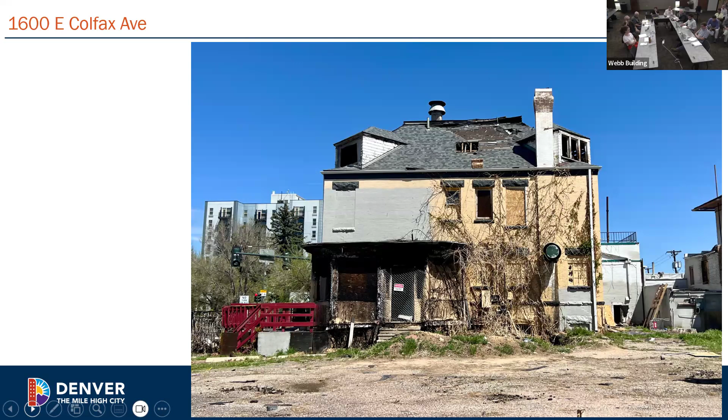So here we just have some current photos of the building, and you can see the massing of the original mansion and the 1938 storefront. And then you can see the photos from JVA, which show a significant amount of fire damage.

Initially, this building did have a skylight in the roof and an oval staircase, which you can see in these images here, which contributed to the overall character of this building. Finally, I have some images of the property when they were historic mansions, then the widening of Colfax Avenue, and finally photos from the 1980s showing that commercial storefront.

So due to the fire damage caused to this property, the applicant has applied for total demolition of this structure.

Chapter 30 of the Denver Revised Municipal Code, colloquially known as the Landmark Ordinance, states that the findings of the commission shall be based on consideration of specific design standards, presented plans, public testimony, and related findings of fact. If an application for demolition is approved, the commission shall require a replacement structure or other site plan as a condition of the demolition approval.

Landmark staff evaluated this property based on chapter 30 of the Denver Revised Municipal Code and what it means to be contributing. The definition of contributing means a structure or feature that adds to the historical, architectural, geographical, or cultural significance of a structure for preservation, or a structure in a district for preservation.

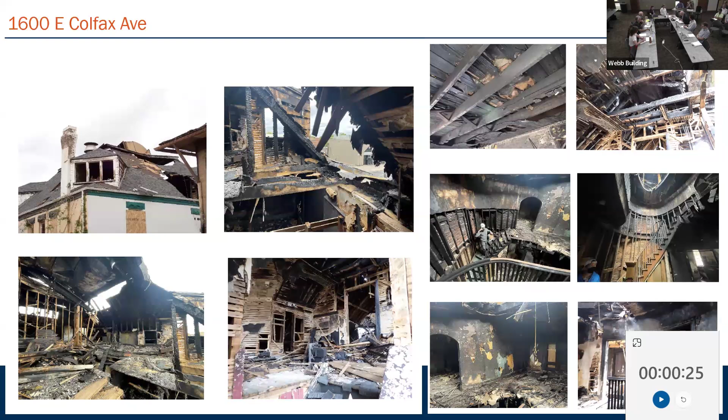So I would say, leading up to COVID, we had 3 tenants that occupied the building, which were huge in keeping people out. So you had customers coming and going. We left that parking lot open at 1450 Franklin that we own for Octavio's restaurant. That kept people coming and going.

At that time, we did put up cameras, so we were notified anytime someone was on site after hours. Octavio, who owned that restaurant, did a tremendous job of keeping people out, because he's operating that business.

When COVID hit, all the business on Colfax shut down, shuttered. And that's when we began boarding up those locations.

At that point, we also thought we were closer than we were in reality to getting approval and a building permit. But we had set expectations with Octavio: hey, we're redeveloping this whole site, right? There's a 7-story apartment building that's going to get built behind this. These homes are getting redeveloped. A part of that redevelopment is removal of all of the environmental issues, right?

So the amount of pigeon activity in the 1618 building needed to be removed. Both buildings were full of asbestos. At that time, Octavio found another space and moved out. So we used that time to mobilize and bring in the abatement team, abated all of the asbestos and all structures.

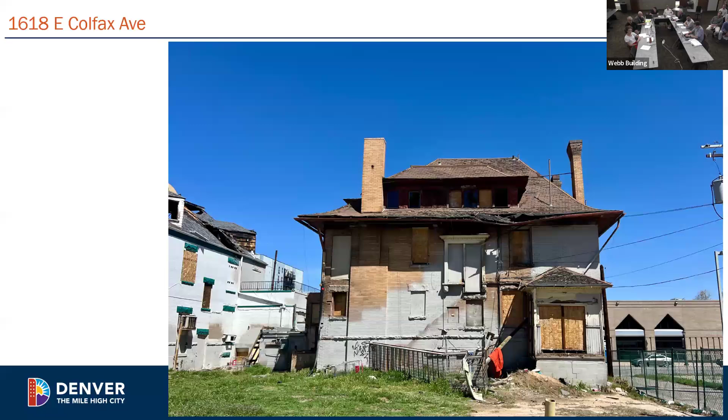I have some additional photos of this property so you can see the condition it is in. It is a beige brick. The painting on the structure is due to graffiti orders from the city; this is how they mitigate graffiti, by simply painting over it.

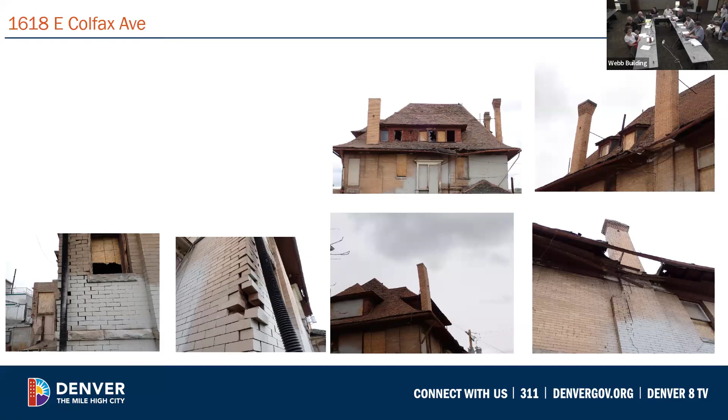Here you can see the addition that is brick, but the front facade has been reskinned and reclad. Here are some photos from the condition report by JVA showing that the materials need attention, along with the same historic photos. You can see the first addition to the property, which was brick, and the changes that have occurred over time with the recladding and reskinning of those additions, as well as a partial view of 1618 East Colfax.

So staff are recommending denial of this request to demolish, as this is a contributing structure to the Wyman Historic District. Our guidelines state do not demolish contributing buildings, and to take all measures required to retain and repair contributing structures.

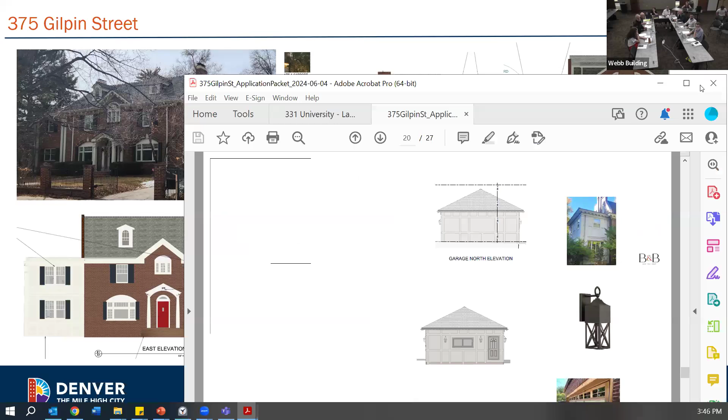The applicant also provided some example photos of other paneled wings in this historic district, which they drew their inspiration from. And that's what staff based it off of. I was trying to find the specific page in the application, but staff felt that it was recognizable as a modern addition. It did draw from the context in the district without being too replicative.

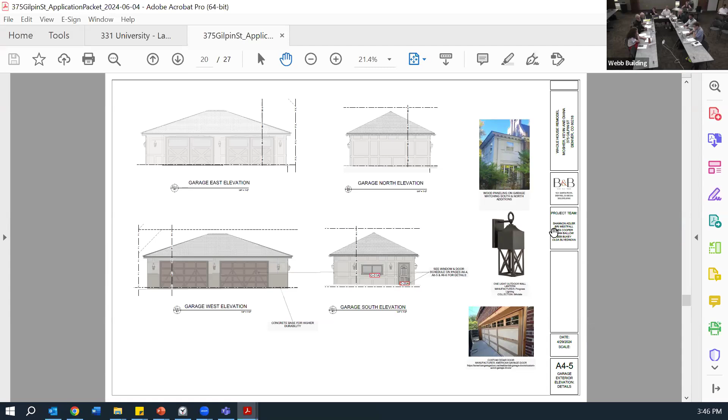And we felt that it was subordinate to that primary structure. They're also referencing the existing height for that non-historic addition, so they're maintaining that height of the non-historic addition there as well. Very good, thank you.

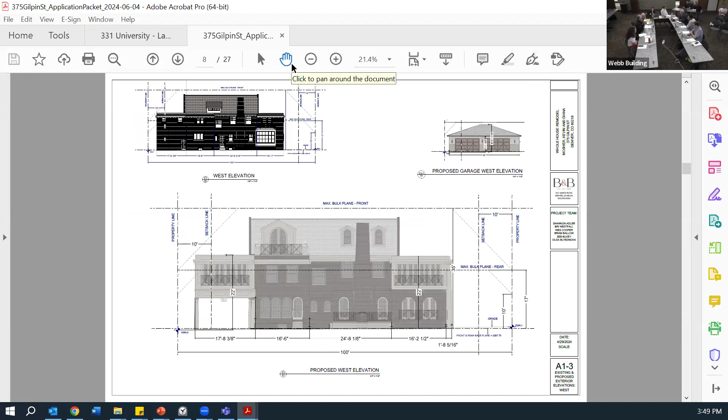Can you speak to that? It's just the design that spoke to them, really. And so your client, you said, texted you and he said there is precedent for a pass-through garage from front to back in Country Club? I think 345, which is in the application, is a double-sided garage on the alley, as you can see.

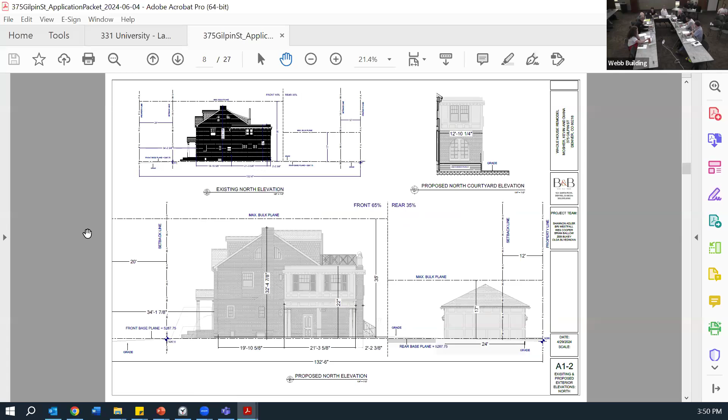Sorry to interrupt again. No, you're fine. No worries. It appears like in the presentation images that are included, you can see the garage doors under the porte cochere, but then the bigger piece in the alley. I looked at that, I couldn't see it. It's a two-story, almost like a carriage house, but it's got a garage coming through the backside. So it's existing functionality, doors down, which is the precedent that was referenced. Got it.

Very good, I'm satisfied. Okay, thanks, excellent. Any other questions, commissioners, for applicants? Doesn't look like it. Thank you very much. Okay, yeah, great, thanks.

Do we have anyone here in the public that wants to comment on the project? Doesn't look like it. Anybody virtually, Taylor, that would like to make a comment on this project? We do have one person, Kevin.

That's a property owner. Okay, that's part of the- well, we still have time, 8 minutes and 48 seconds. So that's okay. We will give him 8 minutes and 48 seconds if he would like to take it.

Kevin? Yes, hi. Hi, how are you? Yeah, good, we can hear you. There's still time left over from the applicant presentation, so we've got 8 minutes and 48 seconds for you to make your comment if you wish.

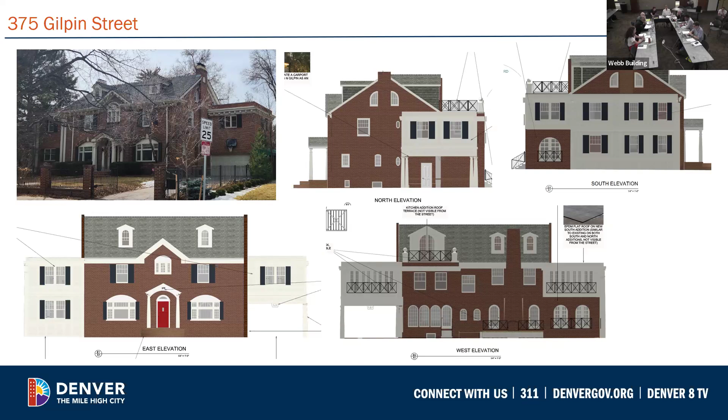And then I raised my hand because I was trying to point out that 345 had the porte cochere that we used as inspiration for the idea. Thank you, Kevin. Commissioners, do you have any questions for Kevin before he goes? All right, Kevin, thank you for joining us. Doesn't look like there are any questions for you. Thank you. Oh, thank you.

All right, staff, any other comments from staff? No, nothing. All right, commissioners, let's go into deliberation. What are your thoughts?

Just want to understand how are they going to manage the remotes for all those doors? Not our problem, that is not our purview. It's just as well as I manage the remotes to my own one TV.

Any other comments, commissioners? All right, do I hear a motion from the floor? Madam Chair, I'll move to approve application 2023-COA-277 for alterations, additions, and garage at 375 Gilpin Street per design guidelines B4, B7, C6, 2.14, 2.20, 2.24, 3.1 through 3.8, 4.18 through 4.20, 5.18 character defining features for the Country Club Historic District, presented testimony, submitted documentation, and information provided in the staff report.

Graham, thank you. Do I hear a second? Second. I think Erica beat you, Larry. So Erica seconded. All in favor, aye? Aye. Opposed, nay? All right, it has been approved unanimously. Yeah, good luck with your project.

Thank you. All right, we are on to our next design review project, which is 2024-COA-283 at 3327 West Hayward Place in Potter Highlands. And Crystal is our staff person. Crystal? Hello, thank you.

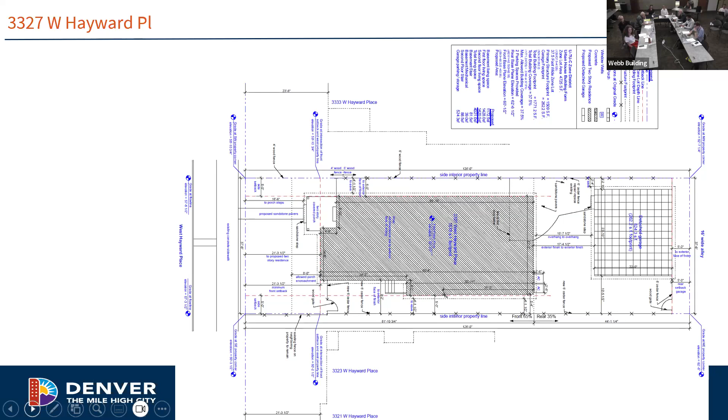Let's see. Nope. Okay, so here's the proposed design. Like I said, a simplified version of a Queen Anne style with a 2-story porch and nested gables with a cross gable bump out, which is characteristic of other Queen Anne properties found within the historic district.

The new 2-story house will include typical features and rhythms found in the historic district, such as window locations, proportions, and that porch location. The overall building height of 30 feet is typical to the district, and the porch and entry location are also typical. The facade uses articulation techniques such as the trim belt course as well as trim window surrounds.

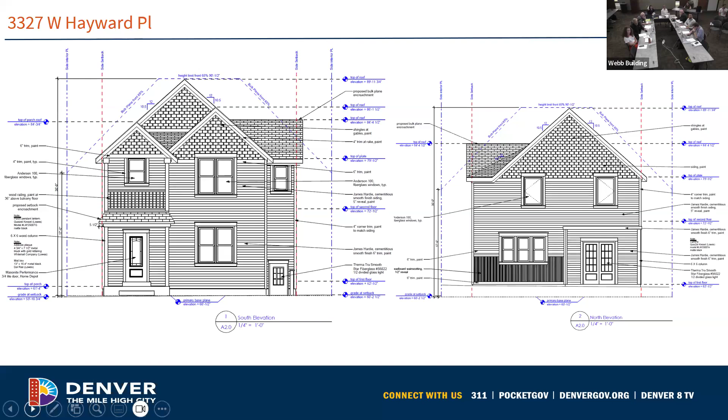Minor changes have been made to the design since phase 1 to better fit in with the historic context. Particularly the 2-story porch now has a closed gable where it was previously open, and the shingle detailing at the gable ends on all sides of the house has been brought down to the eaves to better match historic proportions, as seen at the front and rear facades here.

Next slide. And then here's the other side elevation where you can see the two-story front porch to the right with a simple vertical railing. The home will feature individual and paired 1/1 windows with headers and sills, with those trim detail surrounds at all elevations. Door placements, widths, and heights align with historic proportions.

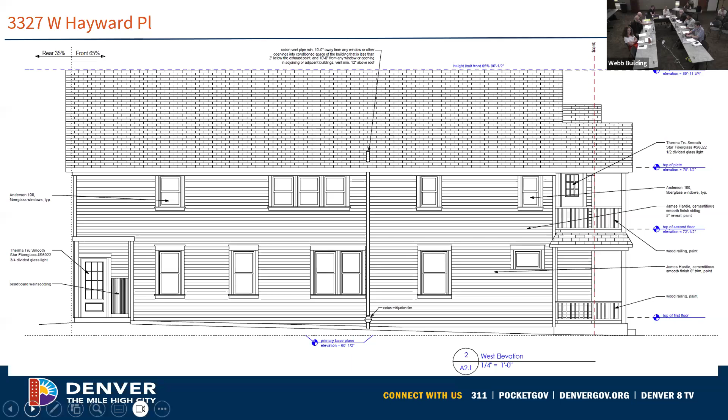Slide. And then here's the proposed garage that will be located at the rear of the lot in a typical location for secondary structures, with garage doors facing the alley, and will be clad to match the primary structure.

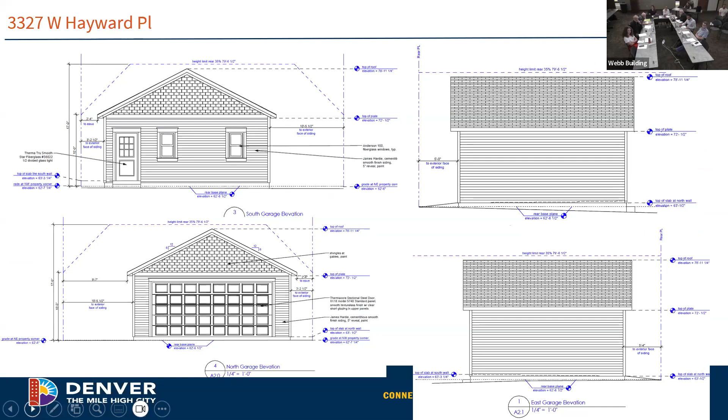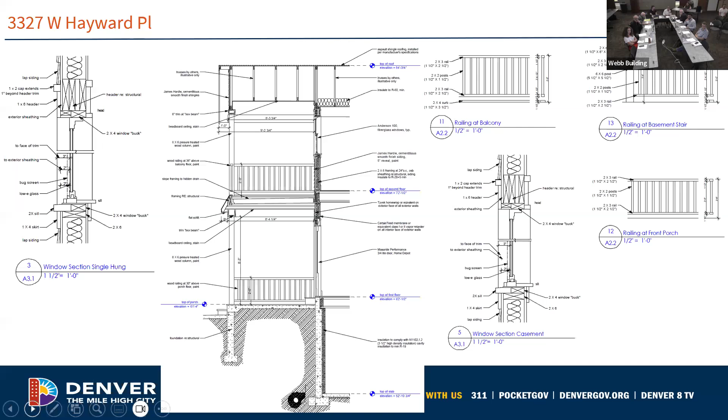Staff also would like to note there is an error in the staff report, as I realized this morning. I didn't correct the motion to call out that this was the phase 2 design detail submittal. So just wanted to let you guys know to correct that in the motion. That would be helpful. Thank you.

All right, Crystal, thank you. Commissioners, any questions for Crystal? Doesn't look like it. Well done, you. The applicant here, they might be on Zoom. Mary is on Zoom. All right.

Mary, I was gonna say, I have, I think it's Ginger on my list. Okay, I just wanted to be sure. Mary might be the property owner too. Yeah, she's the property owner, you need Taylor. Okay, sorry. No, you're fine.

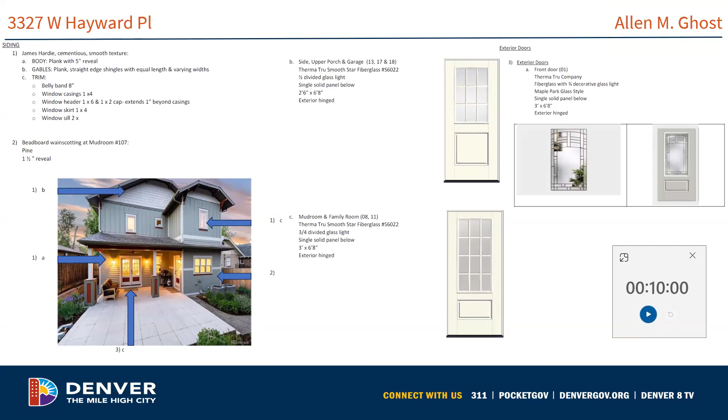Ginger, if you're there, if you could accept our invite to join as panelist. Declined. Connect as a panelist and it's just spinning. Ginger is not getting what she wants. Yeah. Okay. So the spirit is willing, but the flesh is weak. That's a lot on the day. Ginger, you could also try calling in. Looks like she dropped off. Yeah, she might be doing that now. Just give it a second.

I like the color in the photo. It's not great.

I just texted her that she can try calling in. Okay. All right. We'll give her a second here, and otherwise we'll need to get on with the meeting.

All right. I think since we're not recommending denial, we can probably. We heard from the owner. Yeah, we heard from the owner, so, all right, we're gonna go ahead and move forward. There weren't any questions for you all, so.

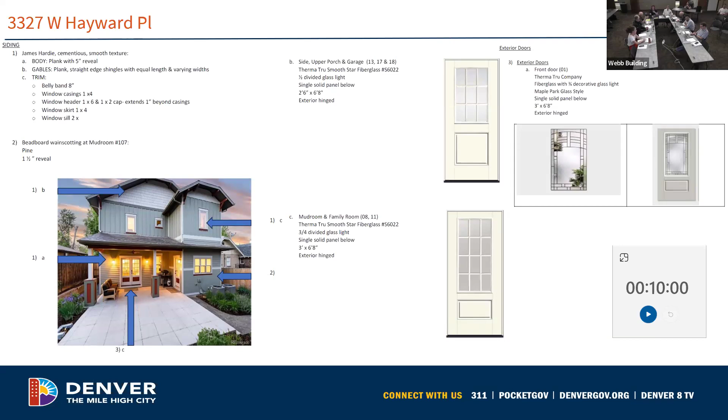Ginger, you can unmute yourself. I think we're going to move forward, as we're not recommending denial, and I don't think we have major concerns from staff. Let's go ahead and ask for any public comments on the project.

Are there any public comments virtually? It didn't look like it, we didn't have any hands raised. Okay, any other comments from staff? No, okay, commissioners, let's go into deliberation then.

What are your thoughts on this project? Cute house. All right, I support that, okay.

All right, do I hear a motion from the floor? Chair, I move to approve application number 2024 COA 283 for phase 2 design details for the new proposed infill structure at 3327 West Hayward Place, as per presented testimony, submitted documentation, design guidelines 4.3, 4.5, 4.7, 4.8, 4.19, the Allen M. Ghost character defining features, presented testimony, submitted documentation, and information provided in the staff report.

All right, thank you, do I hear a second? I'll second. Graham has seconded. All in favor, aye? Aye. And opposed, nay? All right, well, the application has been approved, so 2024 COA 283 has been approved, so you can go forward and be in contact with Crystal.

And speaking of Crystal, she is our staff person for our next design review project, which is 2022 COA 324 at 331 University Boulevard in the Country Club District. Take it away, Crystal. Thank you.

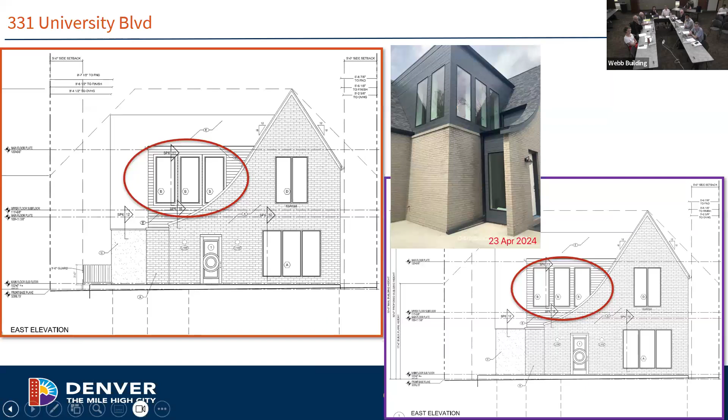Next slide. So here on the right, you can see the approved plans outlined in purple that do not show a trim surround. Here at the center is another photo showing existing conditions. And then here on the left, you can see the new proposed plans outlined in orange, showing a new added trim to be applied around the windows to try and meet that 2-inch inset requirement. The windows are circled here.

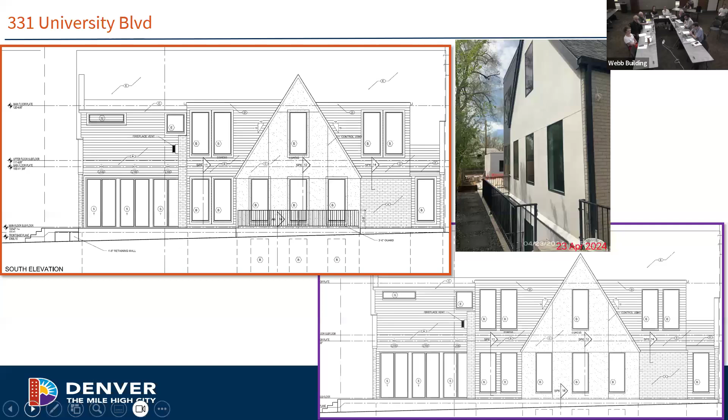So finally, here are the details from the approved plans, calling out that 2-inch inset for the windows on the right, outlined in purple. Outlined in orange on the left is the new proposal that adds that applied trim. The applicant is proposing to add additional trim detailing around all the windows on the stucco and shiplap portions of the structure and the garage to meet the 2-inch inset requirement.

Staff does not believe this solution is sufficient to meet design guideline 4.8F, which states to inset a window into the wall plane at least 2 inches from the wall plane. For a double or single hung window, the inset may be measured from the lower sash.

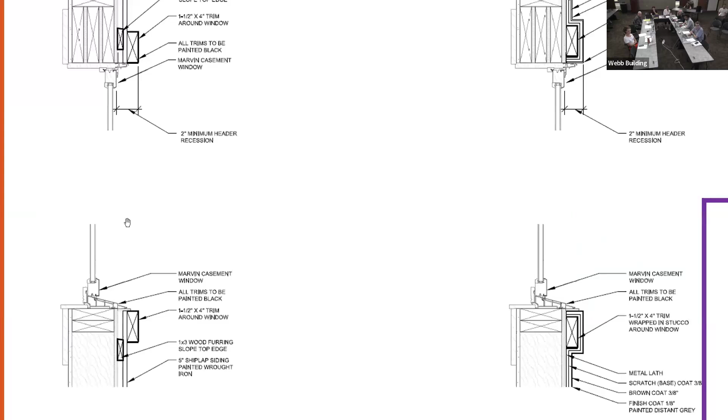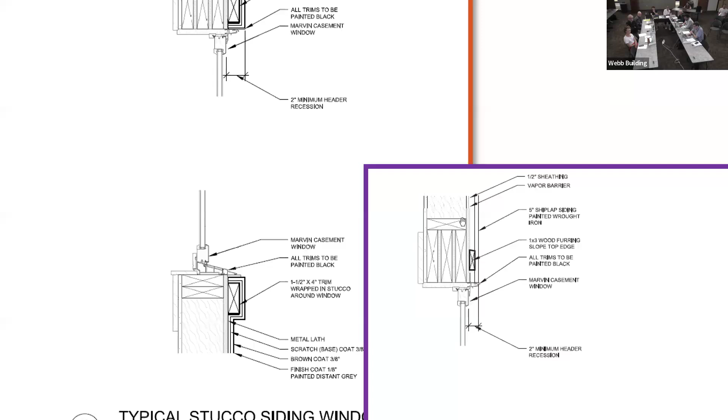Staff let the applicant know that trim could be calculated into the overall inset, but we would be looking for the trim to be a standard thickness and windows should not be coplanar with the wall plane, which was the intent of the required 2-inch inset. Additionally, guideline 4.8F clearly states to inset into the wall plane at least 2 inches. Staff does not believe adding trim after the fact meets this design guideline, and it also changes the look of the windows collectively and the overall design. Therefore, staff is recommending denial of the application.

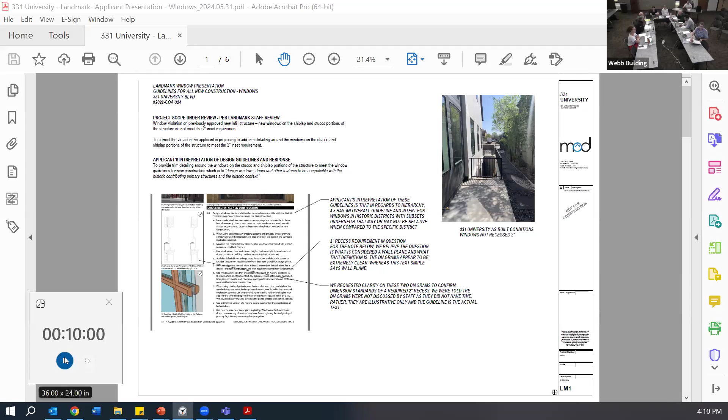When y'all are ready, my name is Nick Young. I'm with Mod Architecture Plus Design at 2060 Hoyt Street.

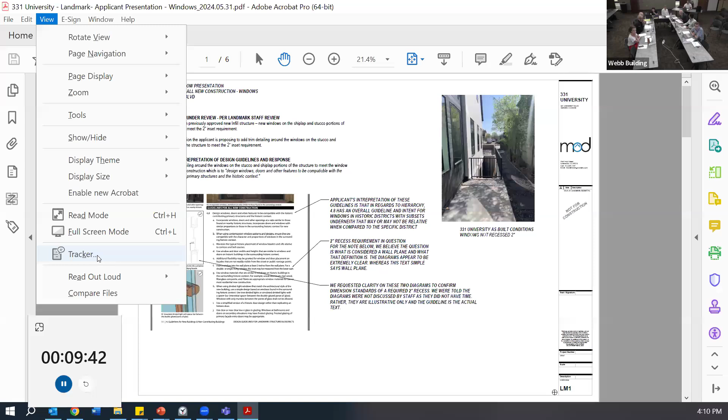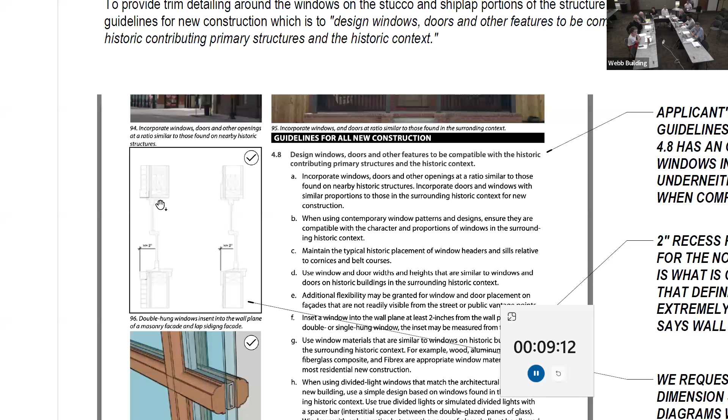I wish this would have been included in the staff report so you guys could have reviewed it. Our direction with this at one point was trying to interpret the definition of a 2-inch recess, because the large concern is we have conflicting diagrams shared in section 4.8. As we've been informed, those are supplementary sketches that appear to be measured to the outside of trims and or sills or headers to the glass face of a window. If we zoom in on those and compare that to a subset of section 4.8, letter F, it clearly says wall plane.

I agree with staff's interpretation that a wall plane should not include trims and headers. I think we have a supplementary drawing that does not adhere to the intent of that, so I totally agree with that. For today, however, this document that we put together, and staff's interpretation of what we had shared thus far before these documents, I totally agree with as well.

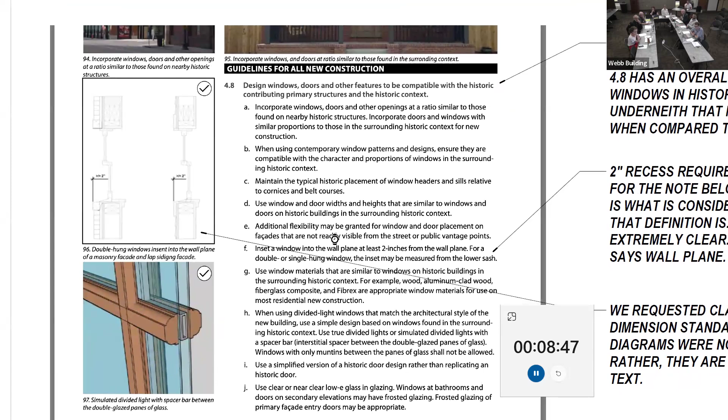However, rather than just providing trim, we went and looked at every single building in the district other than brick. So what we've documented here is every single stucco siding, stucco with trim building. What you'll see is every primary structure represented here.

If you wouldn't mind, go back one last slide. Sorry, I can only go. The entire intent of this study was, I would presume if I'm writing these guidelines, the hierarchy is the bold is the intent of section 4.8, and then these subsets are possible ways to adhere to that big overlying idea.

So in bold, 4.8 is to design windows, doors, and other features to be compatible with the historic contributing primary structures and the historic context. So our next steps moving forward are to identify the context and find out how window applications are represented in this district. So now if we go -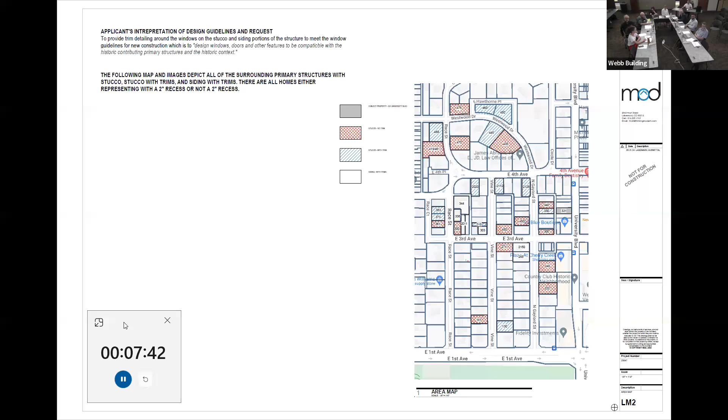So here we analyzed all of those. Next slide please. And so what we came to is we essentially identified 4 different types of primary structures. Buildings that were all brick, of which every single one had recessed windows, obviously due to construction techniques of brick, and windows are to the framing, and then the brick allows that punched window. From there, we then saw 3 other types.

We saw full stucco applications with recessed windows that appeared to be roughly 2 inches. We then also had full stucco primary structures without windows that were recessed. On the next page, we'll see - sorry, I guess there's 4 additional types: stucco with wood trims, and then we also have a 4th category of siding with trims.

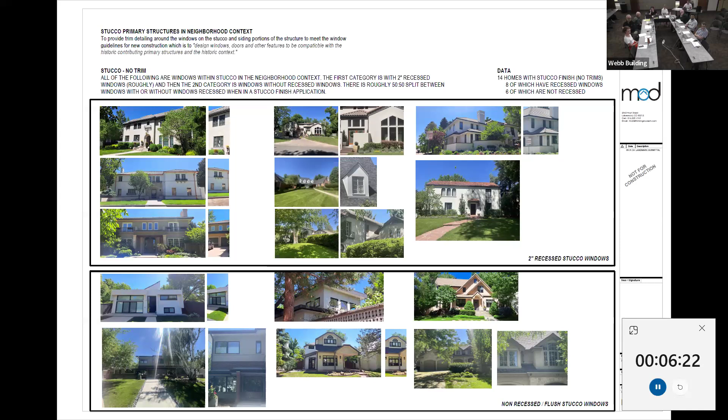We wanted to identify these because these are the 2 applications at 331 University, the subject property - how we address the windows in the stucco and how we address the windows in our horizontal siding in this case. So the first one, straight stucco buildings: we found 14 primary structures, 8 of which had recessed windows, 6 of which did not have recessed windows in the stucco application. If we go to the next slide please.

In addition, we found 10 additional homes that had stucco finish with trims applied. These trims appear to be extra thick as well, about 1.5 inches thick in all of these applications. So essentially we found 24 stucco primary structures, of which only 8 had recessed windows. All of the rest structures, these windows are actually flush with the wall plane and the stucco finish, and then the trim is proud of that stucco finish. And if we could go one more slide, please.

We then identified 7 homes with siding, and these appeared to be either board and batten or shingle siding or horizontal lap siding, of which none of the windows were recessed 2 inches in these applications. All of which, however, did have trims.

So, last slide please. What we would like to discuss today is how to best achieve the intent of section 4.8, which appears to require a 2-inch recess in stucco and/or siding applications. There are only 8 out of 24 stucco buildings that have that detail, and there are 0 other homes with a siding detail of a 2-inch recessed window.

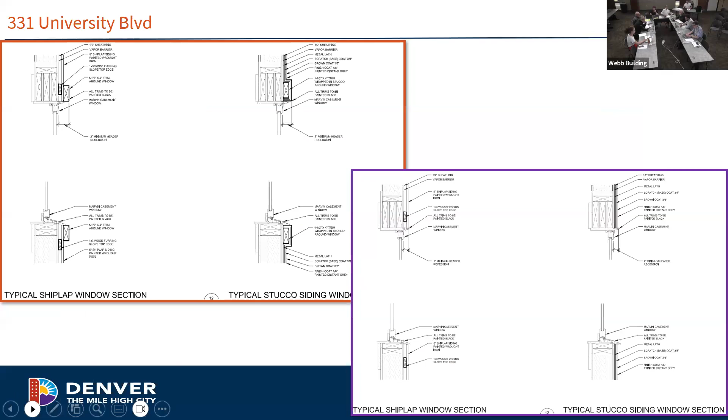All right, public comments. Is there anybody here in person that's not part of the applicant team? Do we have anybody joining us virtually that would like to make a comment? It does not look like it. Okay, great.

Then do we have staff redirect? Yeah, I just wanted to follow up on it. I didn't mention the country club guidelines, but I obviously put them in the staff report, so I just point out to F3 that windows should have a punched opening. I also wanted to note for the presentation the applicant provided today, I didn't receive that until midday Thursday. It was a bit late.

I did allow it, but I did not get to review or look at any of the addresses or examples that they provided, so I don't know how accurate that information is, if those are in the district, etc. And then just to follow up on the diagrams, with the design guidelines, staff typically takes the role that text is what takes precedent.

We do provide images and diagrams to help direct and show what we're trying to say, but text does take precedent. The applicant did ask repeatedly about how we were measuring. I felt I answered that the best I could, which is that we were measuring from the wall plane. The wall plane provided in their plans was just the wall because there was no trim, so them adding trim didn't really meet the guideline.